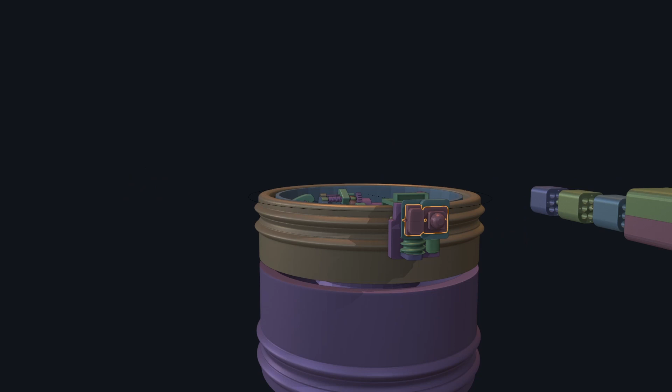So this was going to be the robot that I would have been working on initially. First, I'll just simply explain what's happening with it, and I'll lead on to what made me abandon the project. So let's start with that. What you see here is a visual system. It contains a camera and a distance sensor.

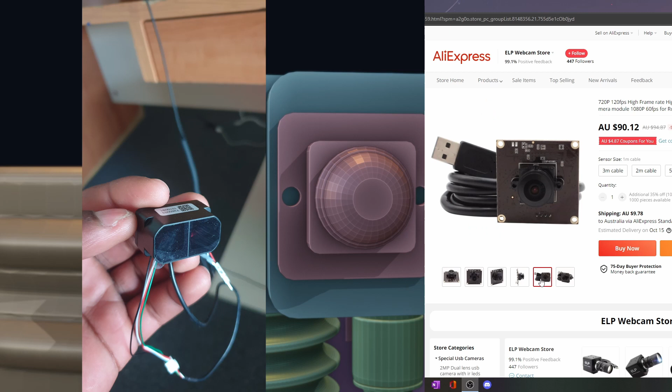And what these two things allow me to do with the robot is that the first obviously gives eyes to the robot, and the other one is there to detect the distance between objects. So for example, let's say I use machine learning to detect a spoon. I could use the distance sensor to tell how far away an object is, and then I'm able to tell the robot, hey, can you please move closer to this object at, let's say, this far away from it. This is what I could do with the distance sensor.

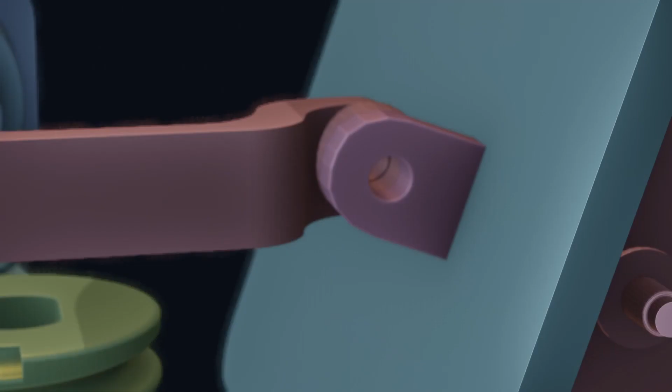It also has another range of motion, which is it's able to tilt up and down, and also it has the ability to rotate around the whole robot. This ability basically means it's able to look around its environment without ever moving anything, just moving the head, or you could say the eyes of itself.

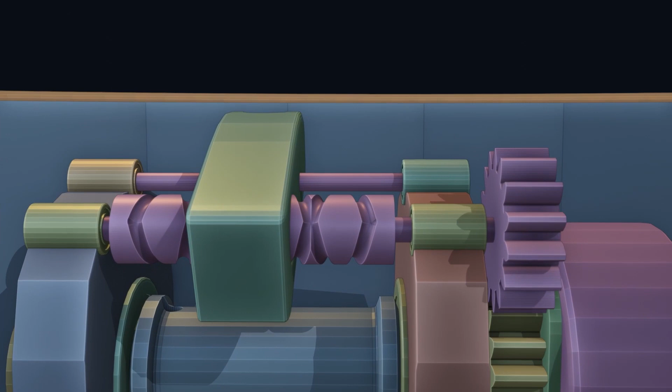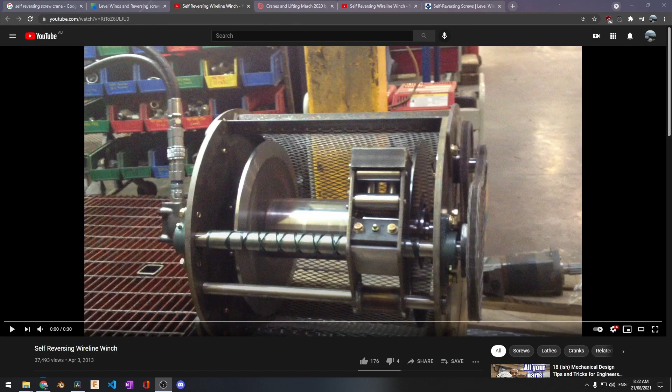This part here is basically a cable management system. All it really does is neatly stack away or wrap away rope in a neat manner. That's it, really. Of course, I did not design this thing. I literally discovered this idea online some time ago last year. The reason why I wanted to implement this idea was because just randomly wrapping rope around a drum made the robot have unstable motion.

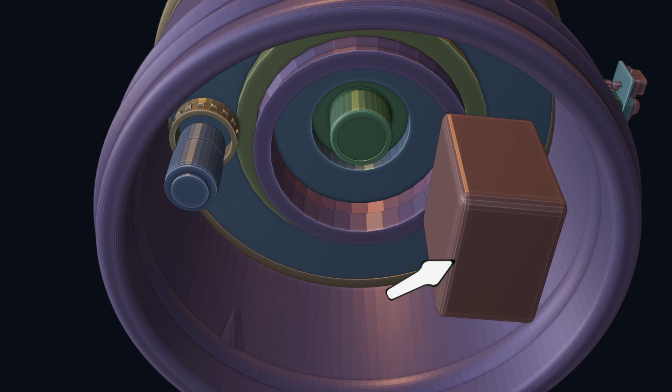And this mechanism, even though it's complicated, will allow a smooth operation, which is what I want, of course. I want it to be stable and very steady. And this mechanism, I think it's gonna do the job. Down below here, there is a computer and another motor, which controls the slew ring.

Now, this slew ring allows the whole bottom part to rotate 360, and yet I'm able to use the slip ring to still transfer power to the motor and the computer, and of course be able to get the sensor data from up above. And yeah, that's really all it is for the bottom part of it.

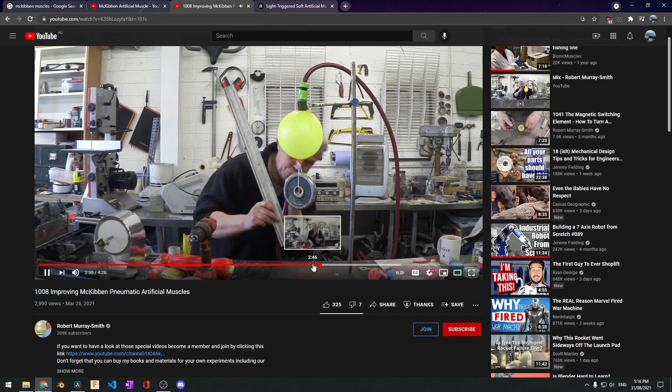Now, this part that you are now setting your eyes on is basically the part that caused everything to change. When designing this part, it basically made me say, if I can make a robotic hand out of, let's say, McKibben muscles, why can't I make a whole body out of McKibben muscle using these designs that I've just created here? That's all it was.

And that idea made me think, hey, I create this design. If I can make a hand, I can make the whole body of a robot. So this took me a long time to try to design. To be honest with you, there are only two things you really gotta understand about this whole structure. And despite how complicated it looks, it is really simple. So let's begin trying to explain what the heck is happening.

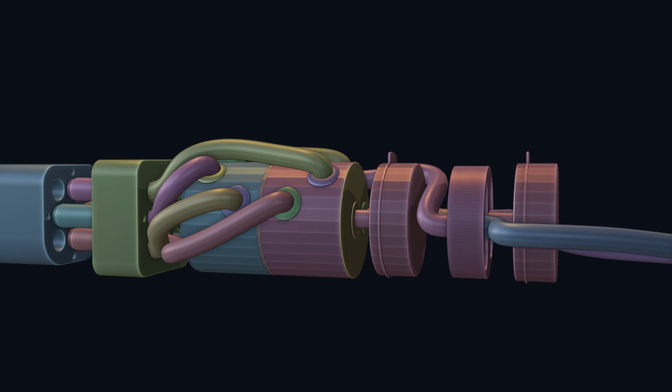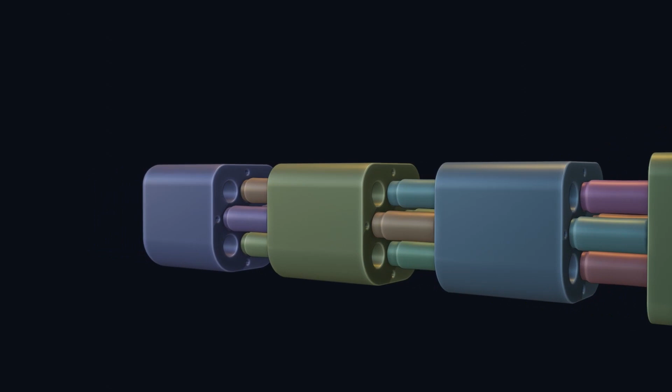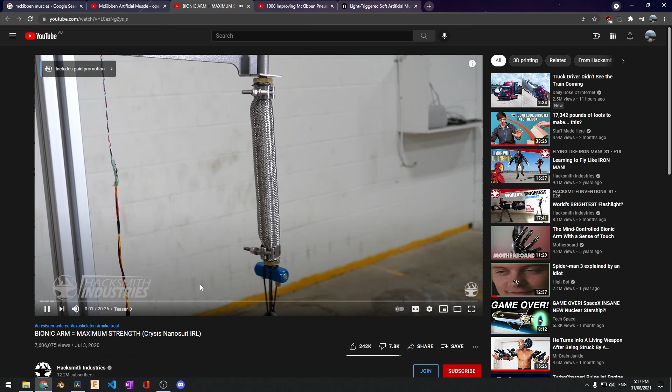You see, in order for me to control a McKibben muscle, I need a solenoid valve, which is basically something that allows fluid to flow in and out of a McKibben muscle. And the thing is, every single McKibben muscle requires individual pneumatics to be able to control the state of the McKibben muscle, whether it's relaxed or contracting.

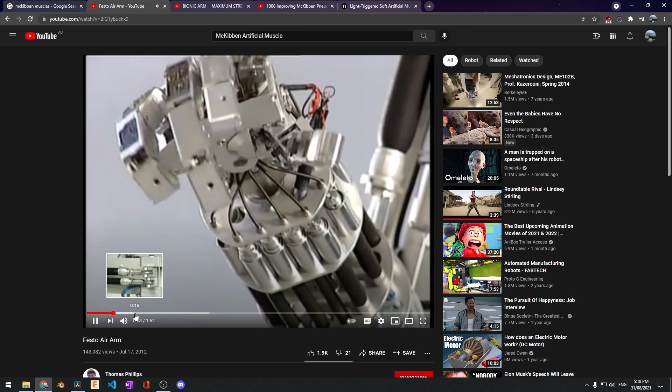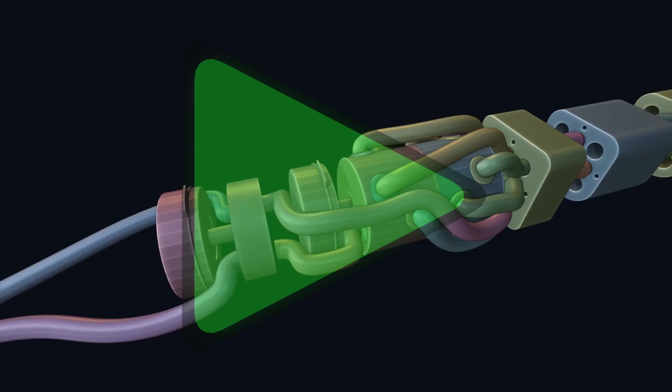So this design is here to address controlling lots of McKibben muscles in such a small area. You see, I haven't even tested this design yet, so it's gonna be an interesting find to see whether this structure even works in the first place. So this is my take on this. The disc basically allows to interchange different inputs and outputs.

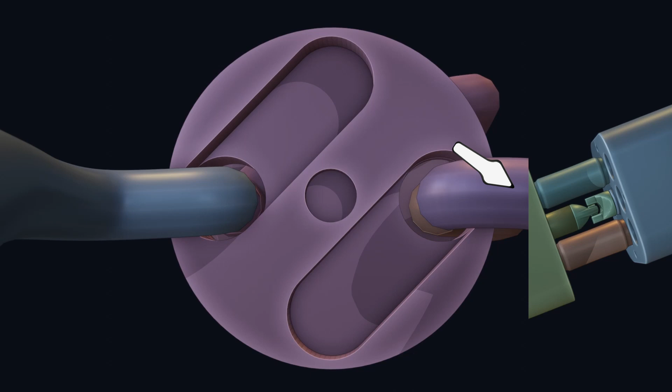Let's say I'm using a motor to pump fluid into this McKibben muscle. The input being the high pressure, which means if I were to expose the McKibben muscle to the input, the McKibben muscle will start to contract. If I expose the output to the McKibben muscle, it's gonna relax. That's all you really gotta understand here. This is literally what this whole design is all about: exposing different pipes, different McKibben muscles, causing them to contract or relax.

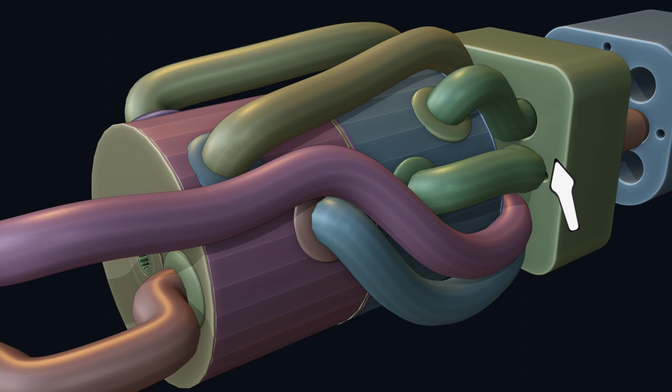So, when the disc spins, it allows different holes to line up to these upper pipes. When that happens, different drums are now exposed to different pressures of input or output. Let's say the upper drum is the input and the lower drum is the output. What then happens is the McKibben muscle that is now exposed to the upper, being the input, every single pipe getting out of the upper drum that feeds to the McKibben muscle, it contracts. But there is a trick to it. It doesn't just do that.

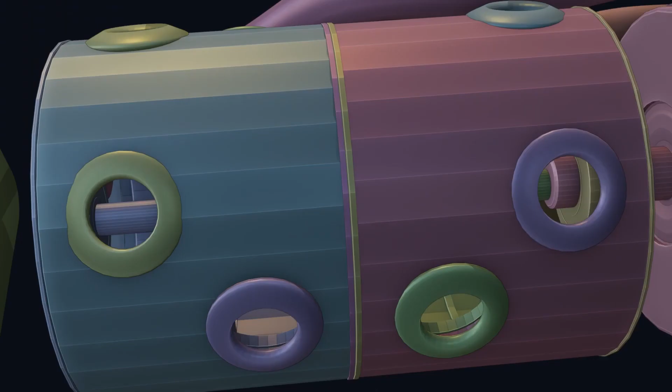So I've designed these drums to have holes in such strategic ways, whereby given that the motor that spins the drum spins at different angles, it will allow different holes to line up with different pipes, causing different McKibben muscles to expand or contract. And this is all there is to it, really.

Okay, if you've made it this far without skipping, I salute you. I mean, it was really boring, let's be honest here. Hopefully my next video, in just 2 weeks, will be a little bit more interesting.